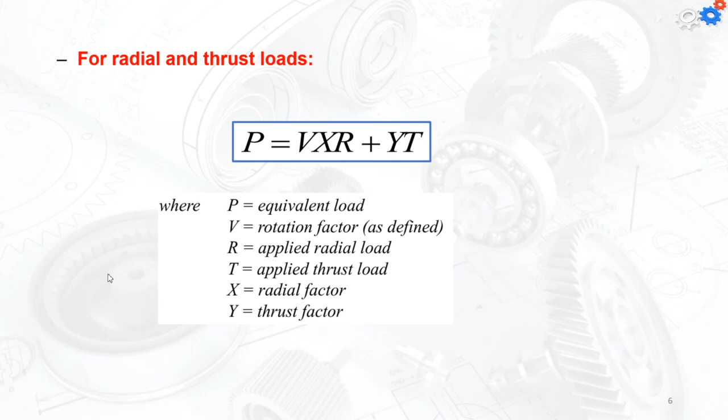So once again, we said that the X and Y vary with the specific design of the bearing and with the magnitude of the thrust load relative to the radial load. Now, for relatively small thrust, the X can be used as 1 and Y is going to be equal to 0 for the pure radial loads, as you remember. There is a difficulty in the bearing selection because the value of the C0 is not known until we select a bearing. Therefore, the simple trial and error method is going to be applied.

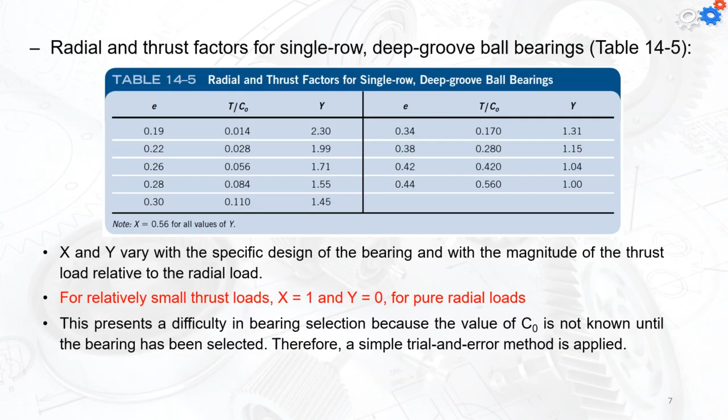So the steps of the calculation start first with assuming the value of the Y from table 14.5; we can use the value for the Y to be 1.5, which is reasonable and about the middle range of the possible values. So we can compute the P value by using the equation VXR plus YT, where the X is going to be 0.56. Then compute the required basic dynamic load C from equation 14.1, 14.3 or 14.4, and then select the candidate bearings having a value of C at least equal to the required value. A little bit more is going to be okay.

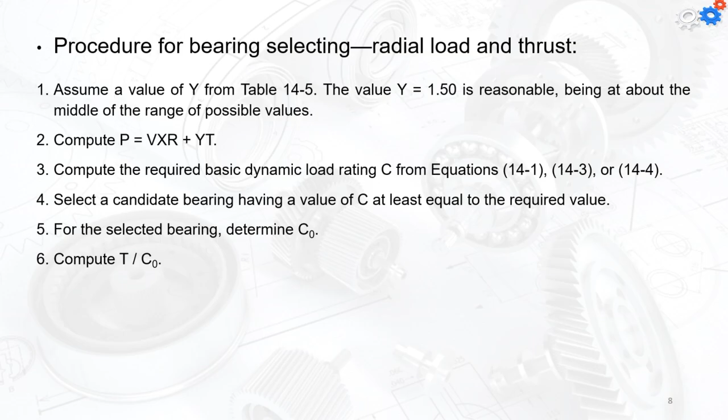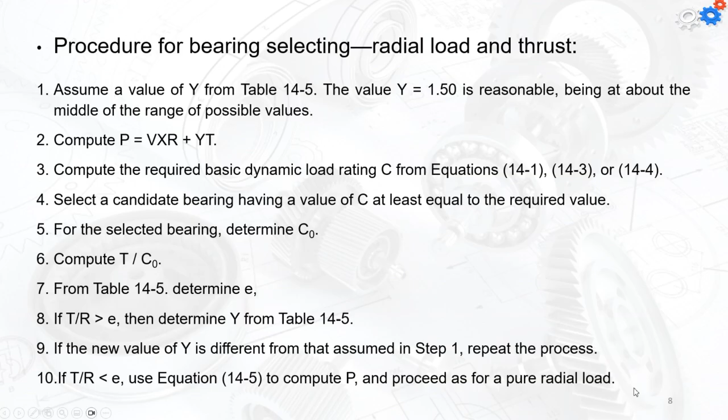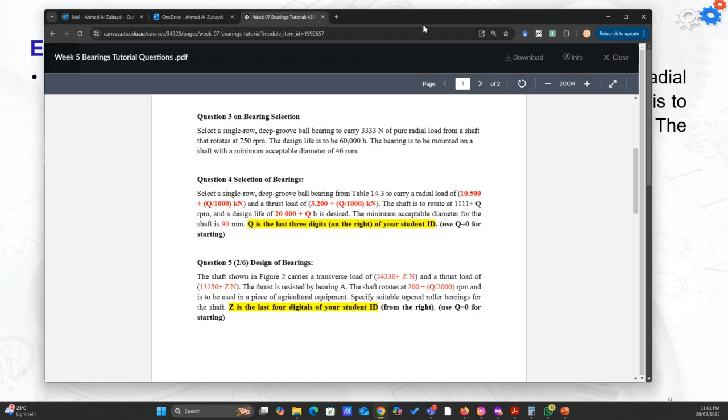So that's just to remind you what equation 14.3 is. However, we're going to have example 14.4, which is similar to the question we have here, question number 4. The difference is that the load is going to be different based on your student number. The thrust load, the RPM value, and the life in hours are going to be different based on your student number, and the diameter is going to be 90 mm. So in general, in the class tutorial, we are working on your own numbers, not going to repeat this question. We're just following the steps.

So once again, we need to select a bearing where the radial load is 8,228 and the thrust load is 3,002 Newton, and the shaft is rotated at 120.4 radians per second, or 1,150 RPM. I can see that the value is not quite different from the one you had in your example. So you just need to first do this one and then you can do your example question. The design life of 20,000 hours is desired, and the minimum acceptable diameter for the shaft is 78.74 millimeters.

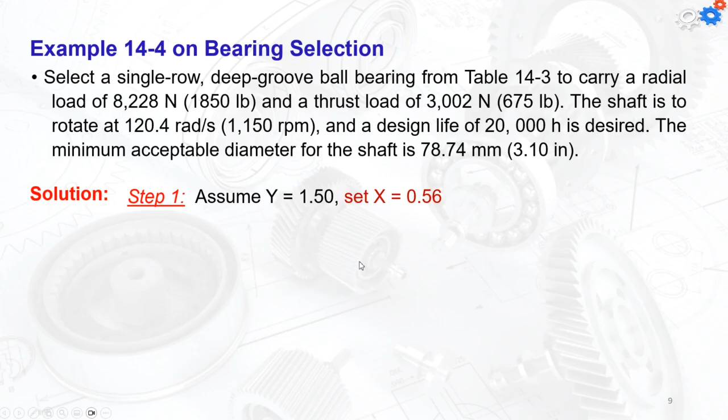Now, we're going to start with the steps one by one. So the solution starts with step number one, assume the value for the Y and X. Second, calculate the P value.

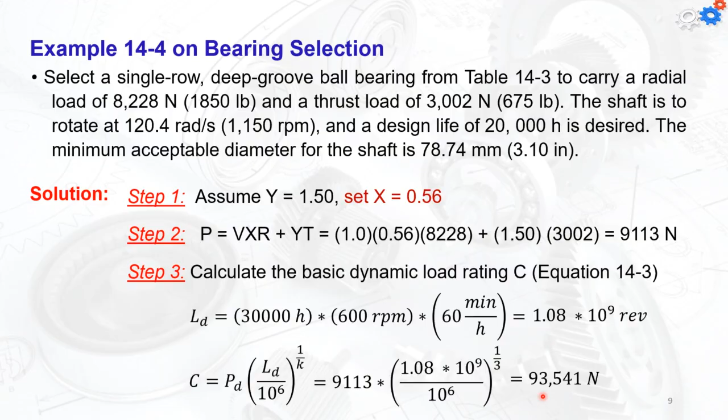Now we're going to go to the table in step number 4, table 14.3, and we may choose the 6316. Now, why do we choose that? We locate a candidate based on the C value of the 93,500. We said that the diameter should be more than 78.8 millimeters. So we look here. That's 75, that's 80. I don't need to go for the next one, which is going to be 85. So let's stay at the 80, which is barely above the 78.8, and that's the minimum diameter we have. So 124, yes, it's more than the value of 93.5.

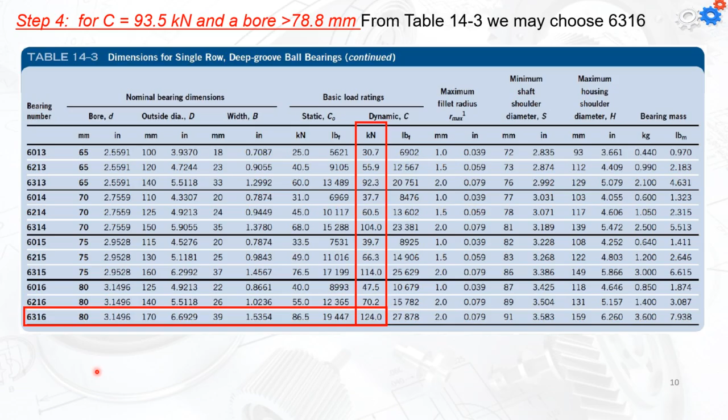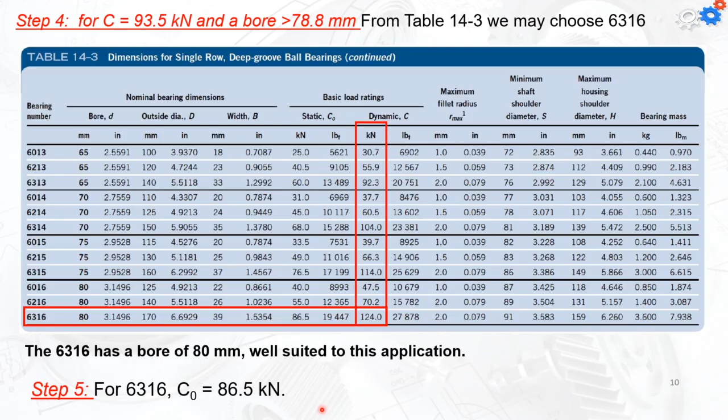And then I will say that the candidate bearing is going to be 6316 for the number of the bearing, which can have all these specifications. But till this moment, I cannot say that this is my bearing. I'm going to continue with the work. So the 6316 has a bore of 80 millimeters, which is well suited for this application. Now, next step, I need to find the value for the static C, or C0. So here C0 is equal to 86.5 kilonewton. And I'm going to use that for my next step.

So step number 5 is, well, actually, I should do that as animation. Anyway, step number 5: for the 6316, C0 is 86.5 kilonewton. So T over C0 is going to be equal to 0.034. From table 14.5, we're going to find e. You can see that the e is based on the value of T over C0. Let's locate between 0.028 and 0.056. If I make an interpolation, I will find the value of e, so it's going to be equal to 0.23, which is less than the value of T over R.

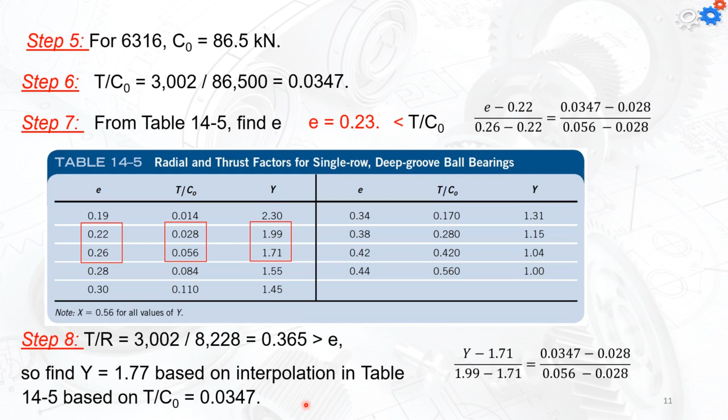And thus, I need to redo the calculation with the new Y value. Remember the first Y we chose was 1.5. So again, repeat the process by finding Y, because T over R is more than e. Find Y by doing the interpolation between these two values. These are the steps, and I found it to be equal to 1.77. So now I will go to step number 9. Based on Y of 1.77, we're going to recompute everything starting with P. So I apply the equation for P with the same X value, and I find that P is equal to

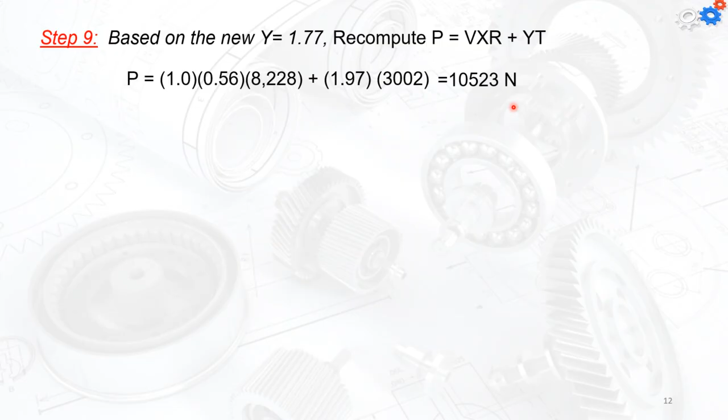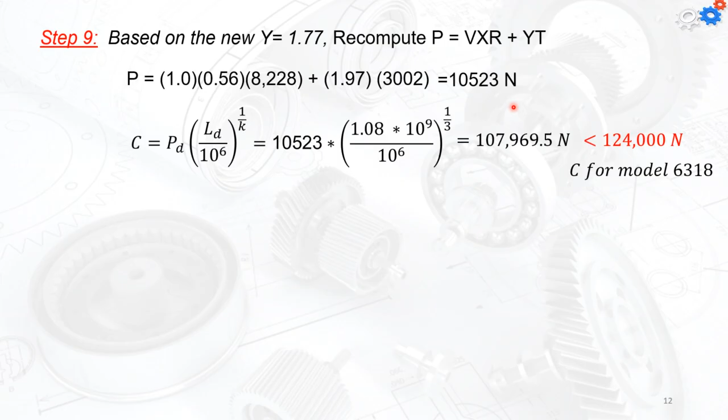10,523 Newton. Now recalculate C; the LD is going to be the same, so C now is going to increase to 107,969.5 Newton. So now I know the new C, and I continue my calculation. I can find that this value is less than 124,000 Newton, which is the C for the model 6316. That means the value of C here for the bearing 6316 is still satisfactory. Therefore, we can specify that this bearing can be used for this application.

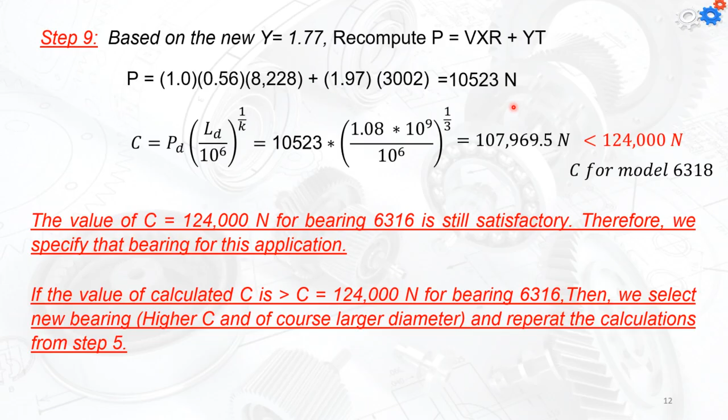If the C value is more than the C for the bearing, then simply we need to select a new bearing which has a higher value of C, and larger diameter, and repeat the calculation from step number 5. So the next question we're going to do is going to be for the tapered roller bearing.